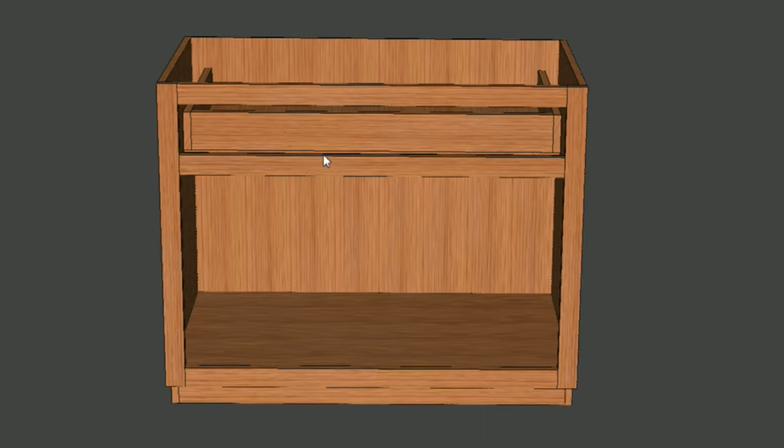Today I'm going to show you how you can make an under sink drawer box for your cabinet. What I've got here is a drawer box and I've removed the back from it, and we'll go over my insets because they are going to be important. We're going to need to know what they are.

My left and my right inset for my drawer box is 1/2 inch. The top inset is 3/4, the bottom inset is 1/4, and the back inset is 3 inches. So, the material that I'm using is 3/4 inch generic for the left, the right, and the front, and 1/4 inch generic for the bottom.

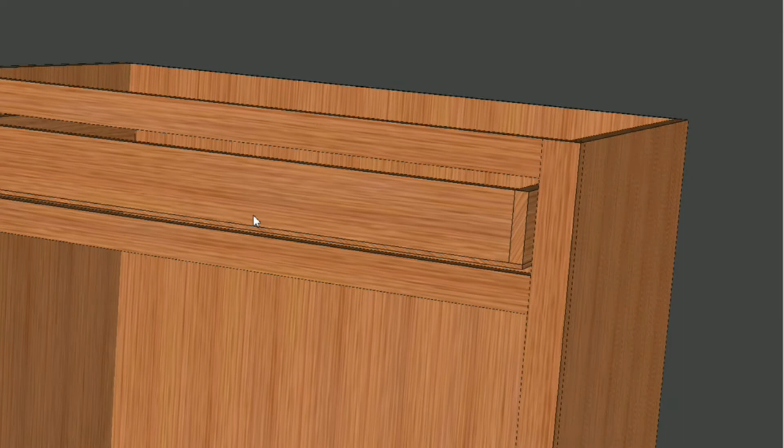Now, all that's important. We're going to be using that information to put our under sink components in here. And what I'm going to do is make a left tray, a right tray, and a front tray. And I'm going to use stretchers for that. But before I get to putting those in, I need some helper stretchers because we can't associate stretchers to drawer box parts. So I'm going to click on my left end and my right end.

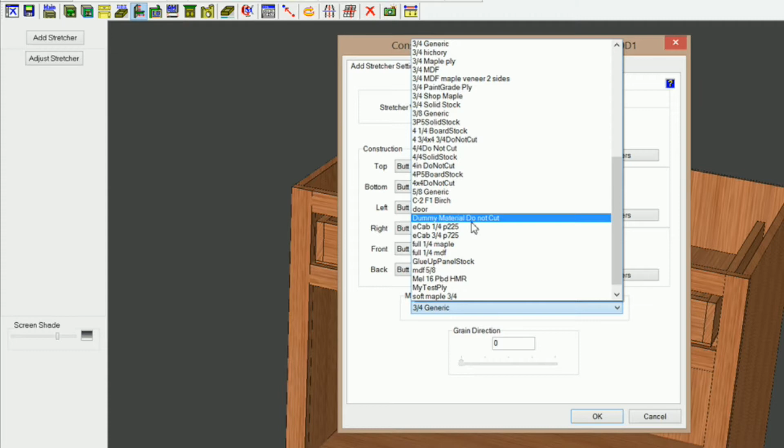But before I do that, I need to set up some construction settings. So I'm going to click on it, and I'm going to set this to be 1 inch, and I'm going to select a material that I have set up for my dummy stretchers or my helper stretchers, and it's a dummy material, do not cut. I've got a red texture on it, and I've got it 1/32 of an inch thick. I'm going to click OK.

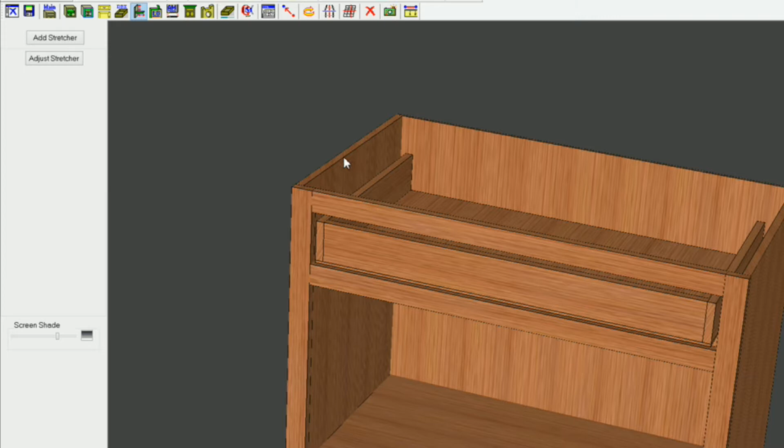Now I can put my helper stretchers in. I'm going to put a left-right stretcher to represent the front of my drawer box, and a left-right stretcher to represent the back of my drawer box. So I'm going to click on my left end and my right end and add a stretcher. And it's got to be an up-down orientation. I'm going to click OK. I'm going to go ahead and add my next one. Make sure it's up-down orientation.

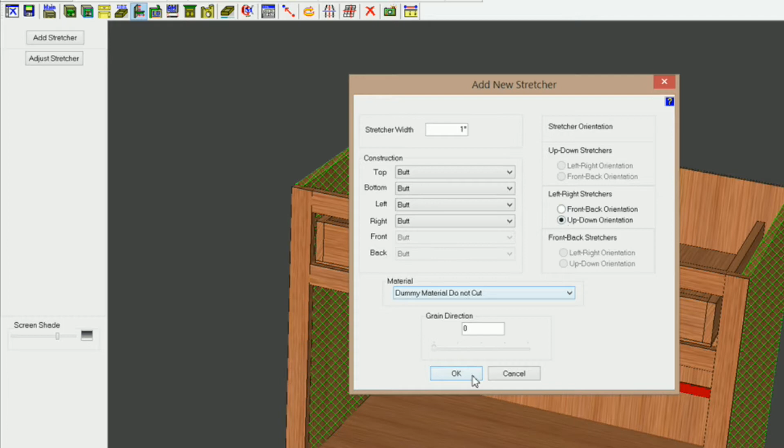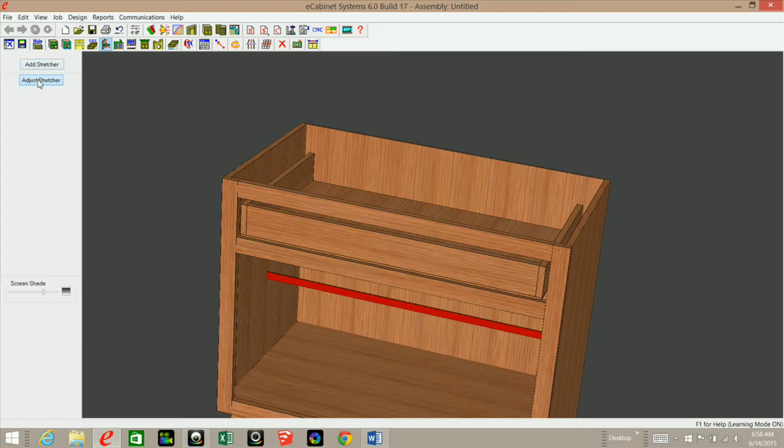And now I need to adjust those. So I'm going to click on this one. Now you see it didn't highlight, but my cursor did turn to that little circle it turns into when it's thinking. I know that it's selected. Sometimes when you got stretchers on top of stretchers like this, you don't see it select. It actually selects the one that's underneath. So I'm just going to go adjust stretcher and Advanced here. And this is the first stretcher that I want to deal with.

And I'm going to be working with Inset 4. What I want is this to represent the inside of the front of my drawer box. And Inset 2 here, I'm going to set it to be on the mid rail and the top of the mid rail. So let me go ahead and get that done. I'm going to go Inset 2 and mid rail and the top of it. Inset 4. I want it to be, like I said, flush to the inside of my drawer front.

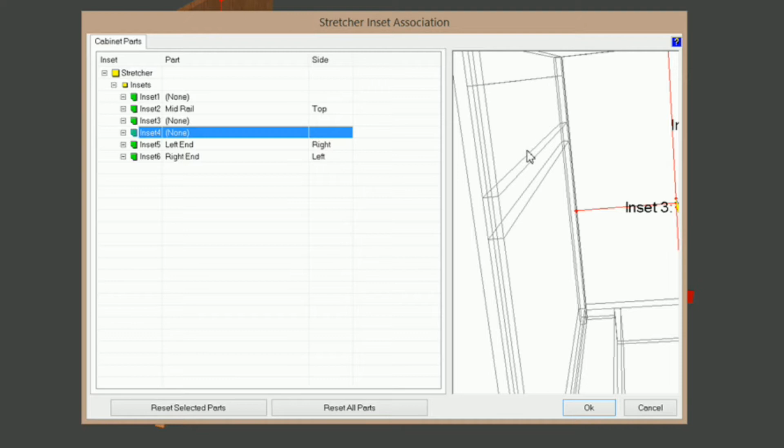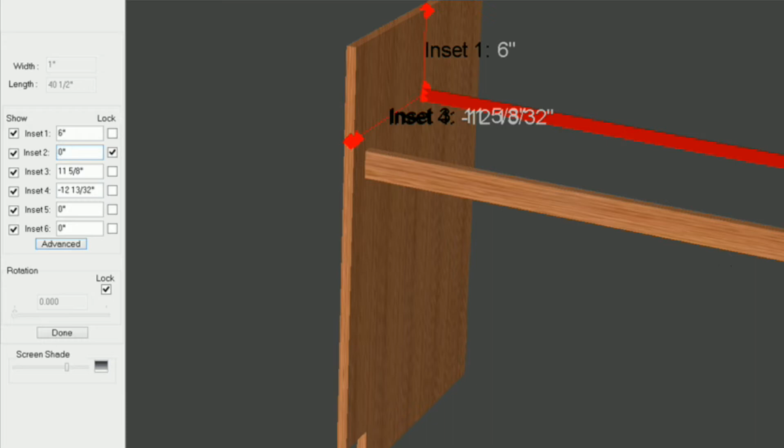Now, I have a 0 scribe on the front of my drawer front, and I'm using 3/4 inch material. But what I'm going to do is go to the mid rail and the front of the mid rail. I'm going to click OK. And under Inset 2, I'm going to set it to be 0, and I'm going to lock it. Inset 4. Now, this needs to be whatever the front inset is for your drawer box.

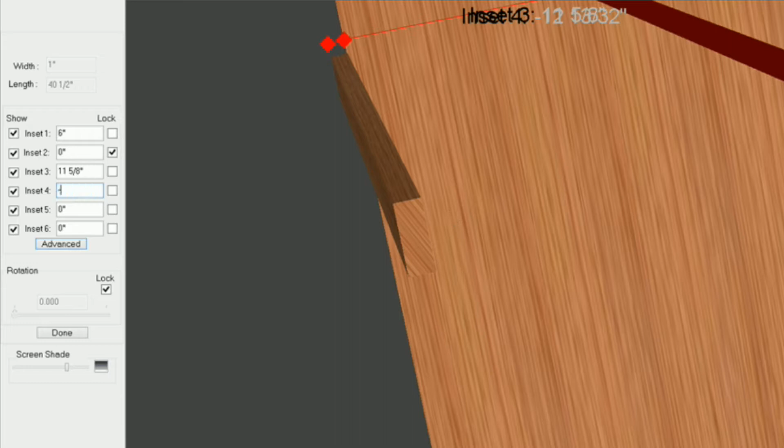So in other words, if you got an inset drawer front going on here, and you got the front of that drawer box inset by the thickness of your face frame here, or the thickness of your drawer front, you're going to need to accommodate for that, plus the material thickness of the front of your drawer box. In this case, I've got my front inset at 0, and I'm using 3/4 inch material, so I'm going to go minus 3/4, and I'm going to lock it. And that should put the back side of this flush to the front of our drawer box.

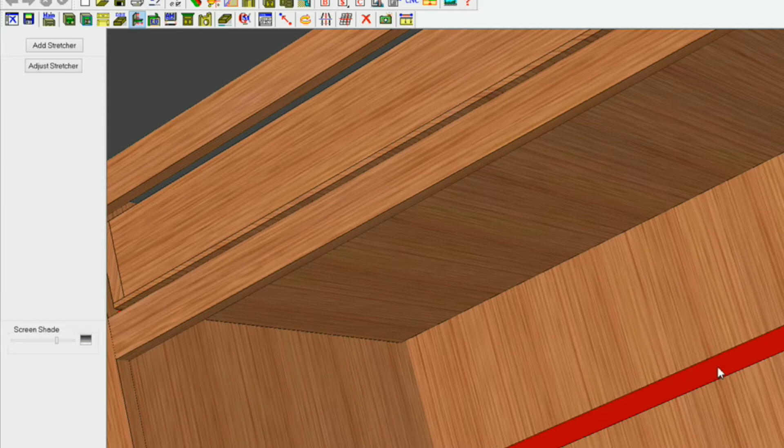So I'm going to click done, and that looks like it did pretty good. So let me go ahead and adjust this one. We'll click on it and adjust. Now this one, we're dealing with Inset 3, and we're going to associate it to the front of the back. So I'm going to go Advanced, and Inset 2, I'm going to go ahead and set it on my mid rail and the top of my mid rail.

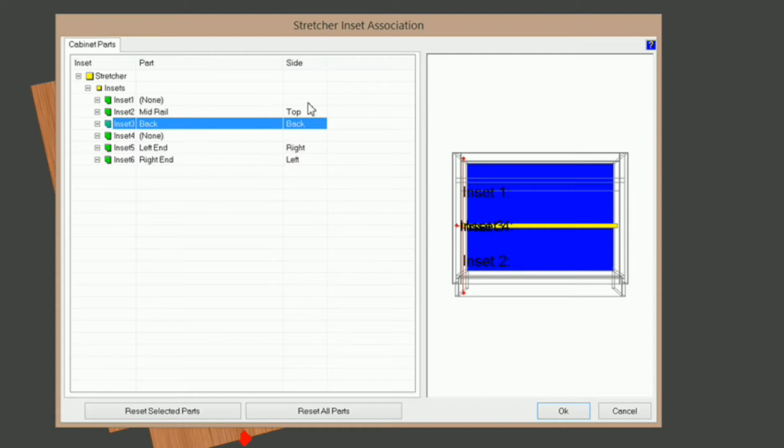And inset 3 is going to be on my back and the front of my back. Okay, because inset 3 is going to represent what would be the inside of the back of our drawer box. Now, I'm associating this to the front of my back.

If I want to remove this back, before I actually remove it, I need to come in here and change the association from the back to one of the ends and the back of one of these ends, because what we're going to do is set this to be whatever the back inset for our drawer box is. So if you remove the back, it's going to go off at the back of one of these ends here. So make sure you remember that.

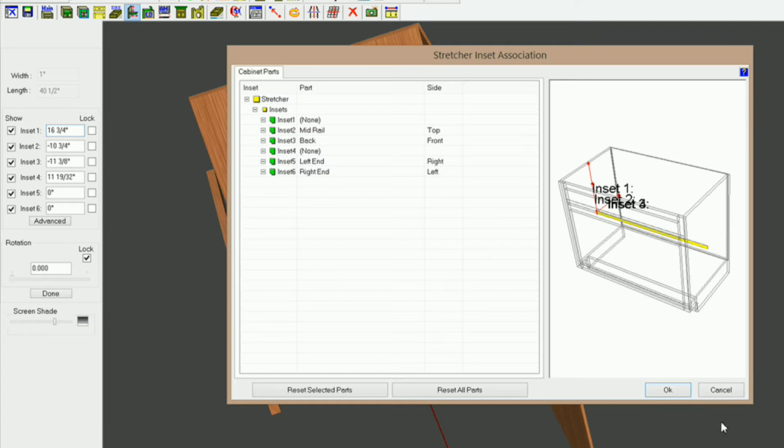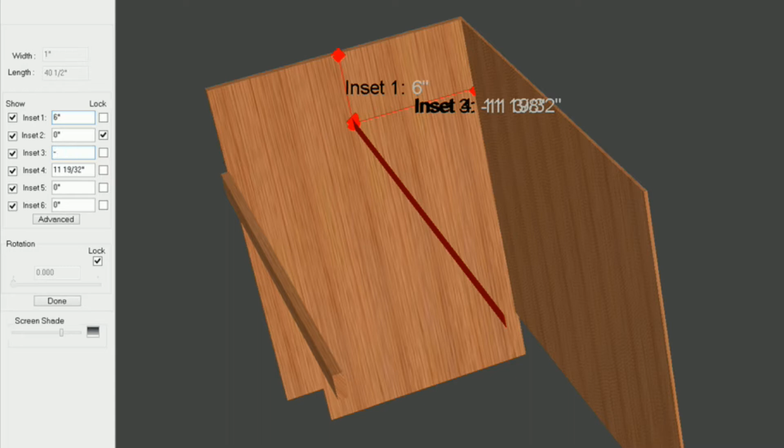If you remove this back and this thing right here is associated to that, you're going to lose a bunch of work. So make sure you remember that. So inset 2 is going to be set to 0 and lock. And inset 3, I'm going to set it at -3 because that's the inset for the back of my drawer box. So I'm going to check that to lock it, and I'm going to go done. We should be 3 inches in here. And let's see, that looks good.

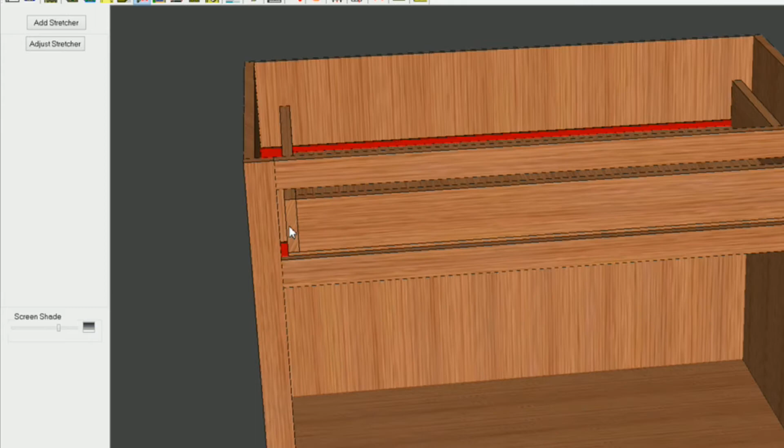Now I can create the rest of my helper stretchers off of those two. So I'm going to create one for our right side of our left tray and one for the left side of our right tray. So I'm going to click on that one and add a stretcher. And it's going to be an up-down orientation also. I'm going to go ahead and make my next one. So add a stretcher, up-down orientation, and put that one in there.

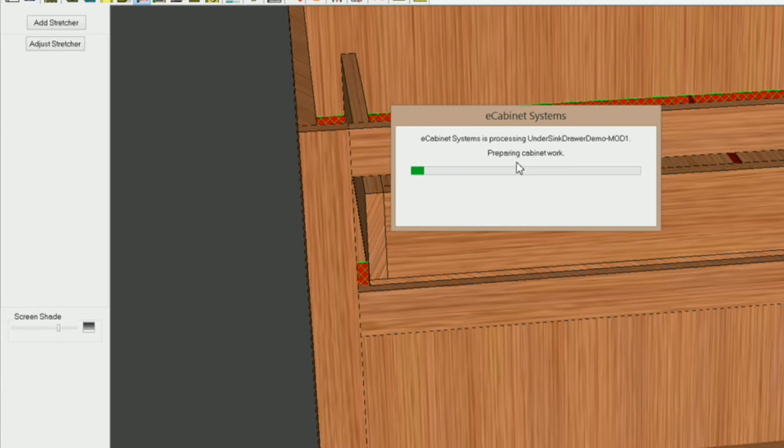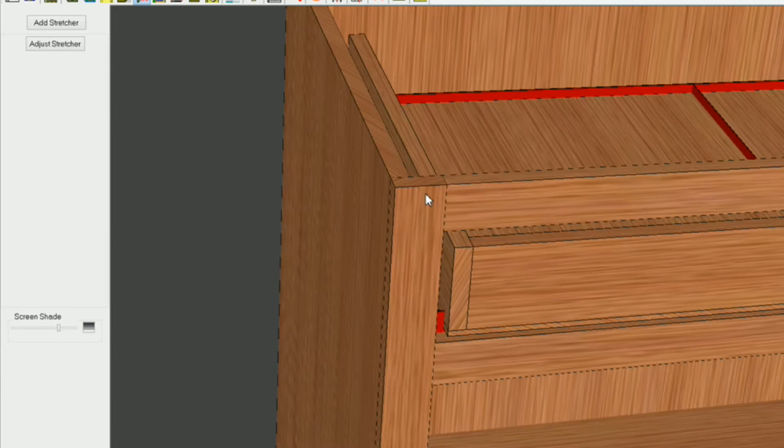Now I'm going to need 2 more, because what I want to have happen here is the components that we put in here, we can't associate them to any of these drawer box parts, and I want them to adjust just like the drawer box does based on the opening height. Okay, so I said a while ago that these were going to represent our tray, but they're not. I'm sorry about that. What they're going to represent is the left side and the right side of my drawer box. Got a little bit ahead of myself there.

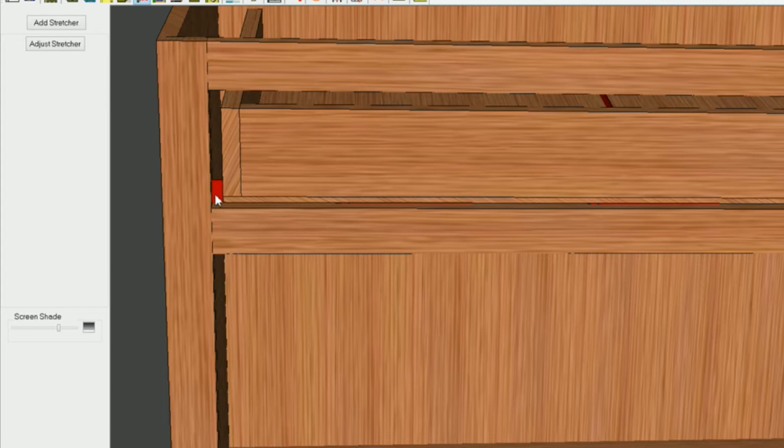But let's go ahead and put those height regulating stretchers in there, or whatever you want to call them. I'm going to click on both of those and add a stretcher. Now this time I want a left-right orientation. Okay, so I'm going to go okay. So there's the one for the top, and I need one for the bottom. I click on that one and add a stretcher. Left-right orientation. Now let's go ahead and adjust these.

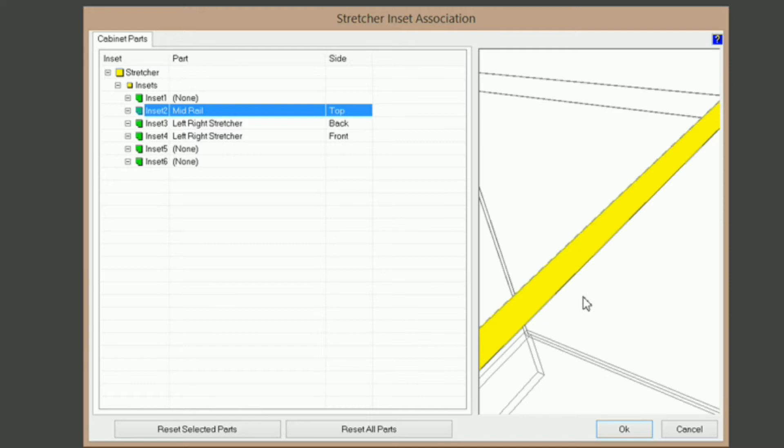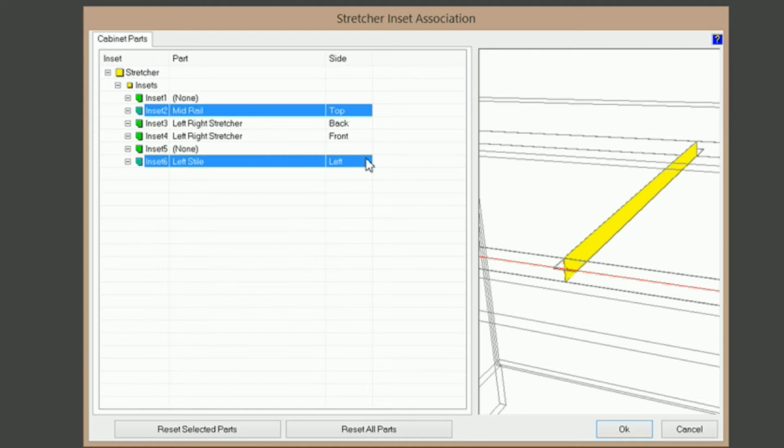So I'm going to click on this one and adjust. And I'm going to go to advance, and I want inset 2 to be on my mid rail again and the top of it. Now we're dealing with inset 6 in this case, because I want this side of this stretcher to be flush to the left side of my drawer box. So inset 6 is what we're going to need to adjust here. So inset 6 is going to be on my left stile and the right side of my left stile. I'm going to click OK.

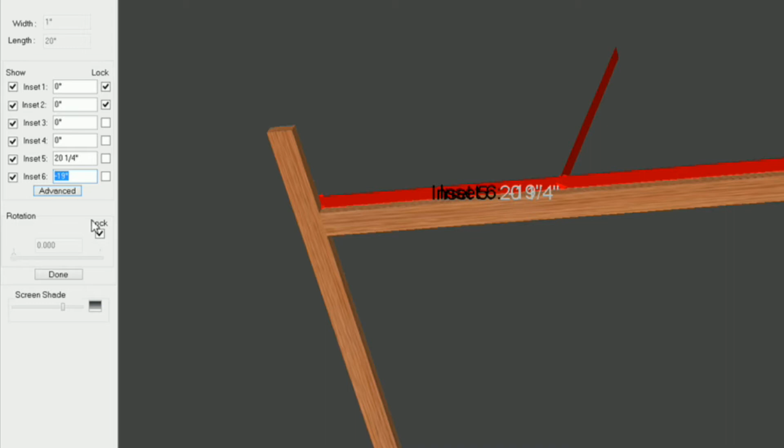And inset 1 is already 0, and I'm going to lock it at 0, and I'll lock this one at 0. Now inset 6, I want it to be whatever my left inset is for my drawer box, which is 1/2, and it needs to be a negative 1/2, so -1/2, and lock, and done. And you can see, if I turn this around and zoom in here, it is indeed flush. The right side of that stretcher is flush to the left side of that drawer side there.

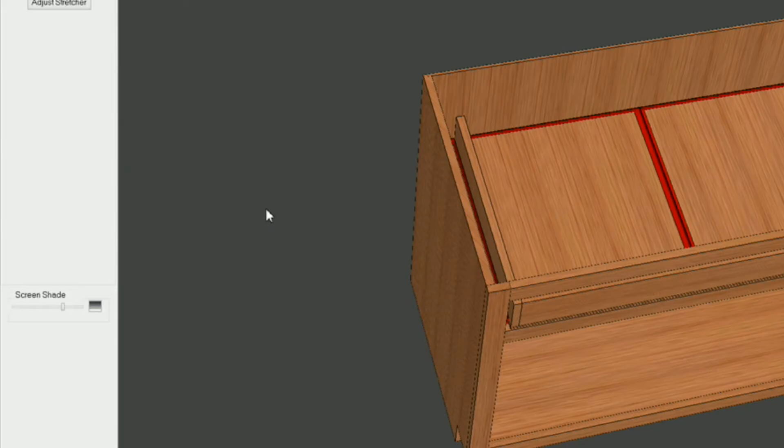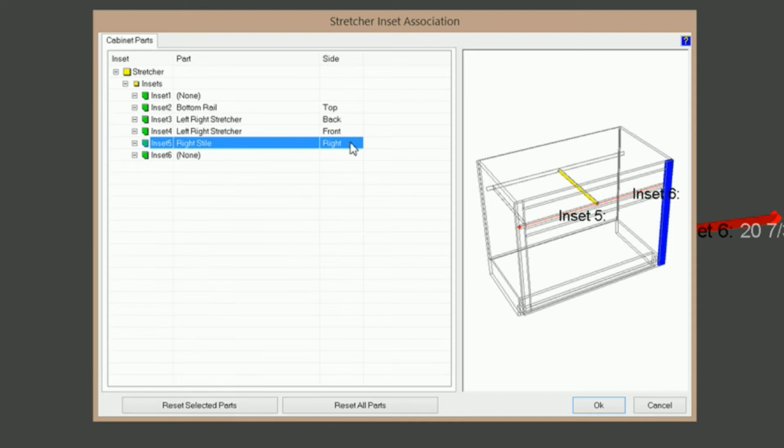So I'm going to come over here and click on this one and do the same thing, except for the right side of my cabinet there. So I'm going to go advance, inset 2, mid rail, and top. And this time I'm dealing with inset 5. So I'm going to click on inset 5, and I want it to be on my right stile and the left side of my right stile. I'm going to click OK.

Now what I need to do is go ahead, and I got something going on right here. Inset 2 is saying 22. Let me go back to Advanced, and you see right here that I've got bottom rail selected, and that is wrong. I need to go to mid rail and the top of my mid rail. Inset 5, I got right stile and left. I'm going to click OK, and now we're back where we need to be.

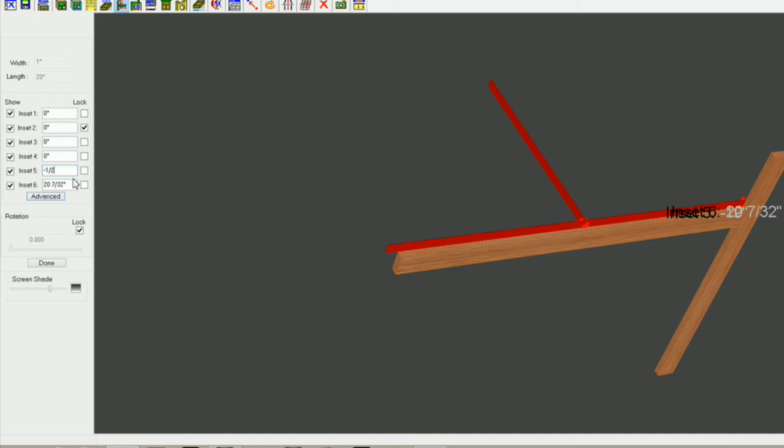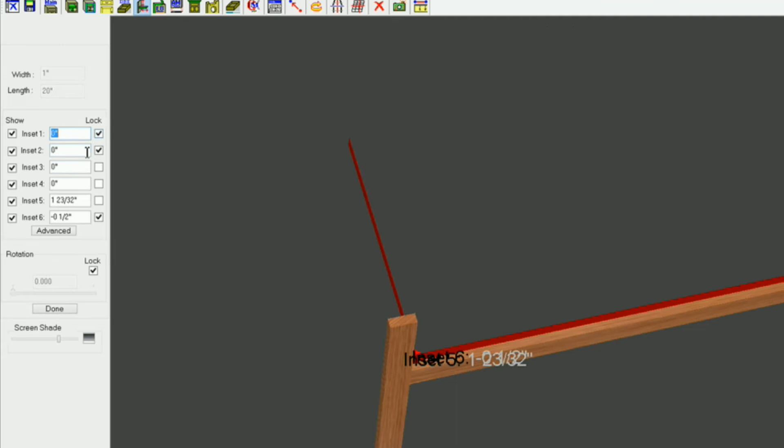I'm just going to lock, Inset 2 there, and Inset 5, I need to be at -1/2, and lock, and that looks good. So that looks fine to me. I want to double check something here. I think I may have locked Inset 1 on this one. I'm going to double check, and I did. I want to unlock that. That might give me a fit later on down the road. So I'm going to go done, and all that looks fine.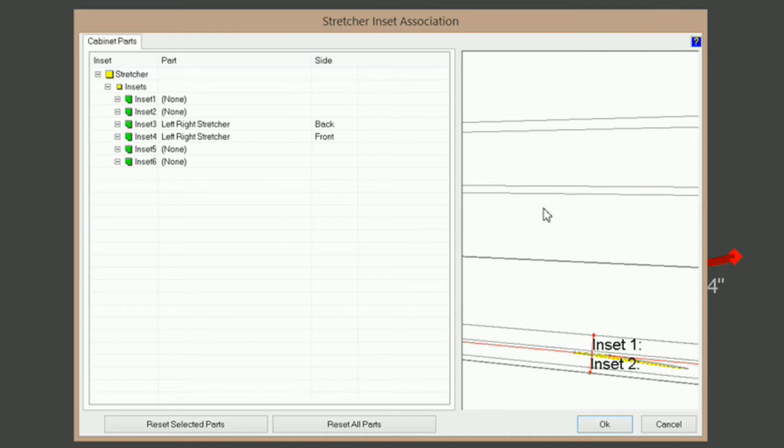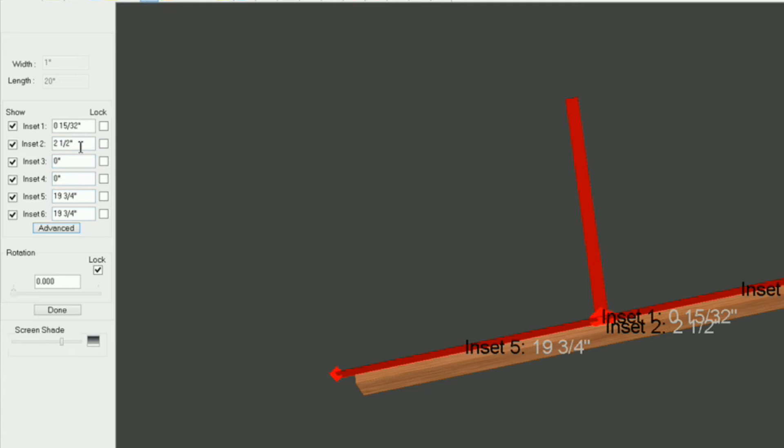So what I'm going to do now is work on these. So I'm going to go to Adjust Stretcher and Advanced. And what I want is, I want Inset 2, which is the bottom of this stretcher, to be flush to the top of my drawer box. So I'm going to click on Inset 2, and I'm going to be on the mid rail and the bottom of my mid rail. Now I'm going to leave everything else just like it is, because we're going to make these phantom parts later on. So I'm going to go Inset 2. I want it to be whatever the top inset for my drawer box is. So 3/4 and lock, and it moved down.

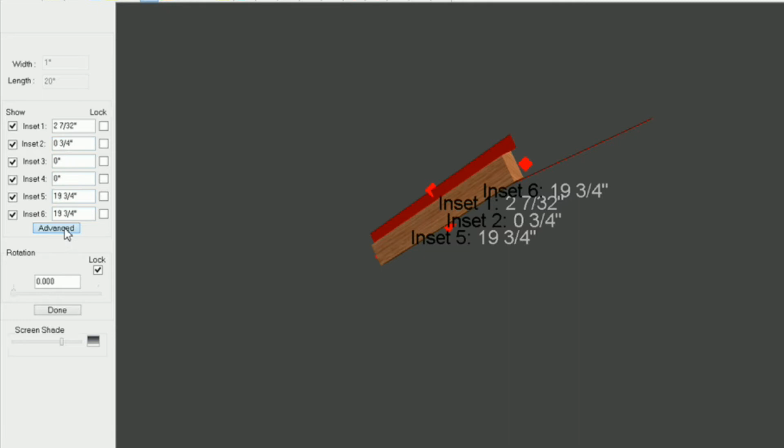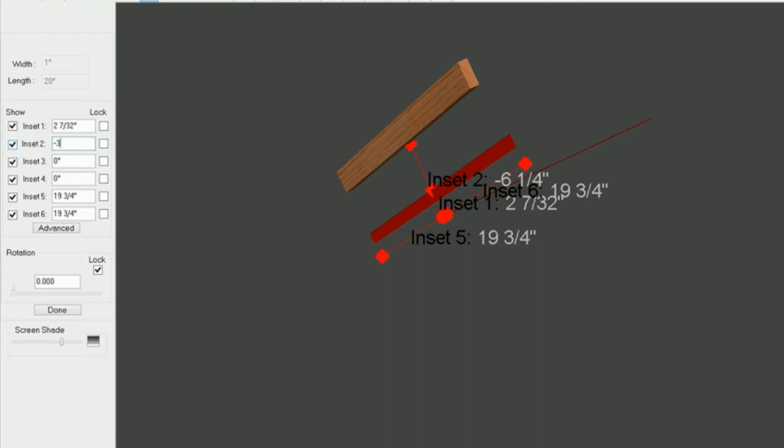Let's see, I've got my inset wrong on that. I'm going to leave it like it is, but I'm going to unlock it, go back to Advanced, and I've got Inset 2 on the mid rail. That really needs to be on the top rail and the bottom of my top rail. Got a little bit confused there. I'm going to click OK, and this needs to be -3/4. It might be a +3/4, but it looks like I'm good to go there. So that's all I need for that one. I'm going to go done and see if I'm flush to the top of my drawer box, and I am.

So now when I change my opening height, that's going to adjust accordingly. Now if you put another drawer box in here and you change this, for example, from 3/4 to 1 or 1/4 inch, you're going to need to select this stretcher, come back to Stretcher Editor, select this stretcher, and go to Adjust Stretcher and make your changes.

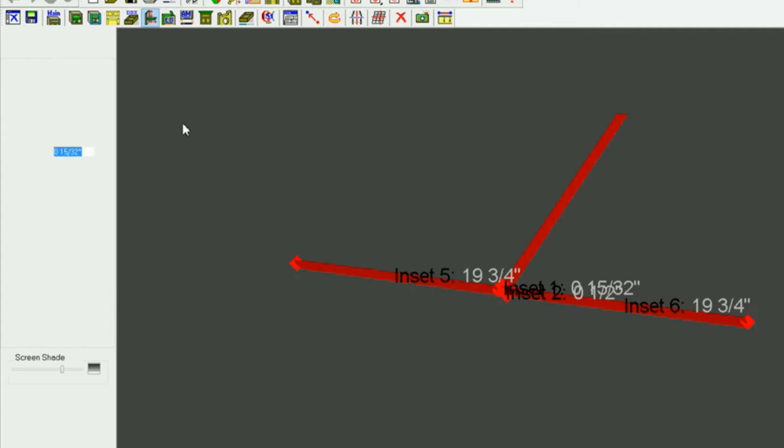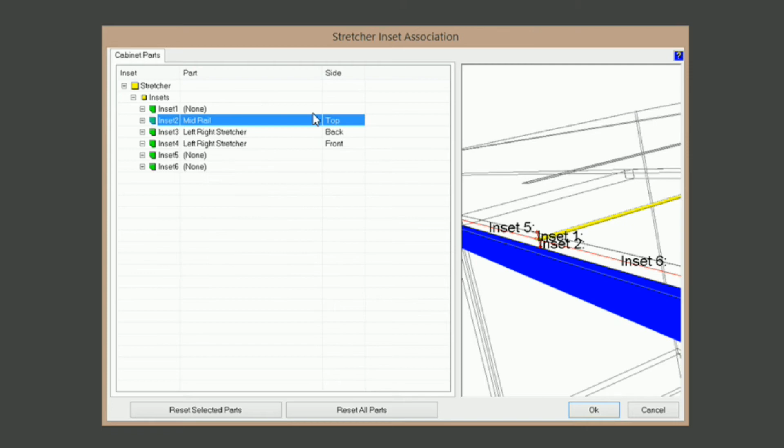Let's go ahead and get this one like it's supposed to be. So I'm going to go Adjust Stretcher and Advanced, and what I want this one to do is rest. Inset 2, I want it to follow the bottom of my drawer box, okay, the inside or the top of the bottom of my drawer box. So I'm going to go Inset 2, and this time it needs to be on the mid rail and the top of the mid rail. I'm going to click OK.

Now right now it's saying 1/2 inch, and that is correct, because I've got a 1/4 inch inset for the bottom of my drawer box, and I got a 1/4 inch material for the bottom of my drawer box. But I'm just going to retype 1/2 inch just to make sure. I'm going to lock that, and I'm going to go done.

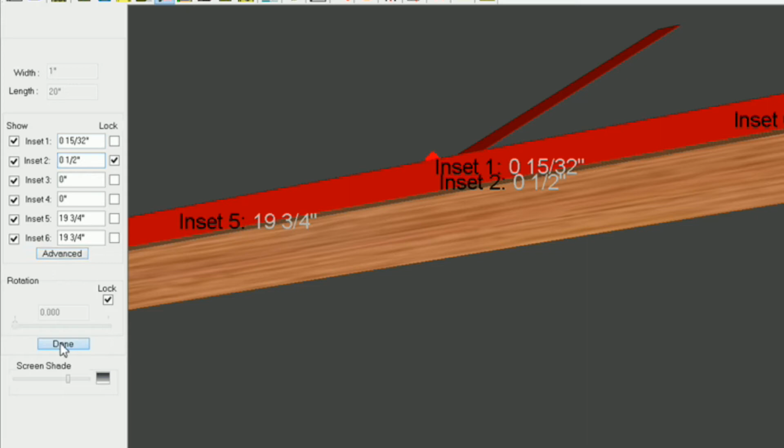And now if you change this inset right here, in other words, you put another drawer box in here and you make that different, make sure you come in here and adjust this. Also, if you change the thickness of your material, make sure you adjust that, because these are going to regulate the height of the components that we're getting ready to put in here.

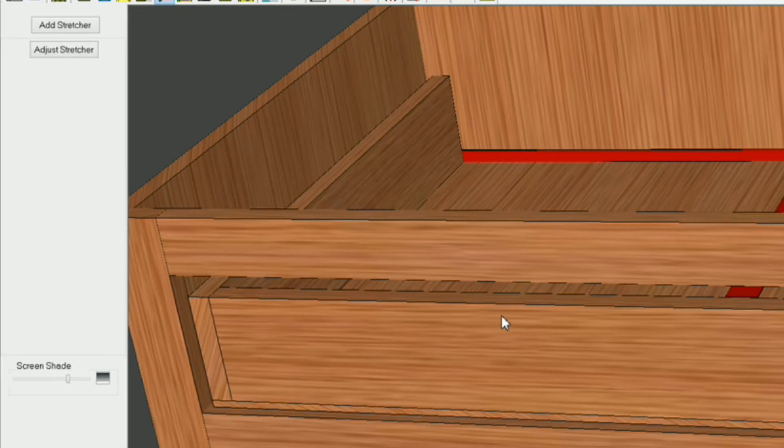So let's go ahead and put some in here. I'm going to create my left tray and my right tray. So I'm going to click on this one, and this one, and add a stretcher. Actually, what I need to do before I do that, so I don't have to do it every time, I'm going to go to construction settings. I'm going to change this to 3 3/4, which is the actual height of my parts for this particular drawer box here.

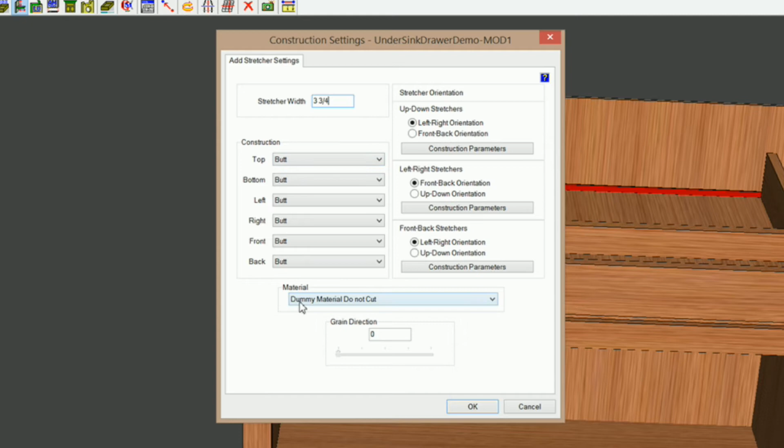I'm going to select my material. It's going to be 3/4 inch generic right there. I'm going to click OK. Now I don't have to select that every time, it's going to default to it for me.

So I'm going to select you, and I'm going to add a stretcher, and I want an up-down stretcher. I'm going to click OK. Now I need another one for my right side. Add a stretcher, and make sure it's up-down orientation. So now I got my left and right in there for my tray.

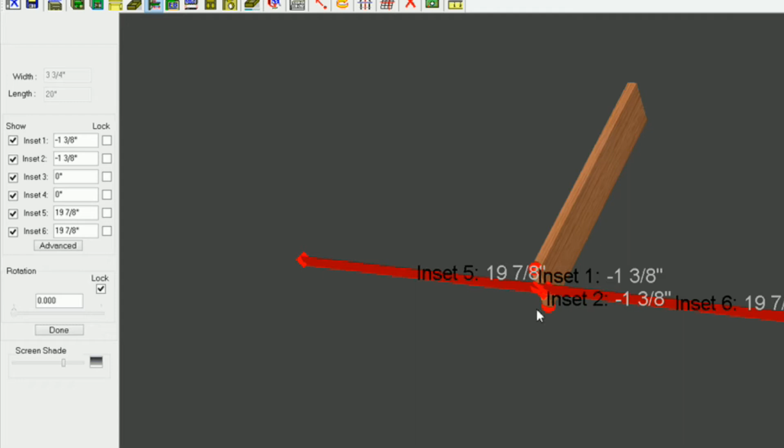I'm going to click on one of them and adjust it. What we're going to be dealing with is Inset 6, or the right side in this case, of that tray. We're going to be able to adjust that by using Inset 6. In other words, this is what's going to regulate the opening that we're going to cut out in that drawer box.

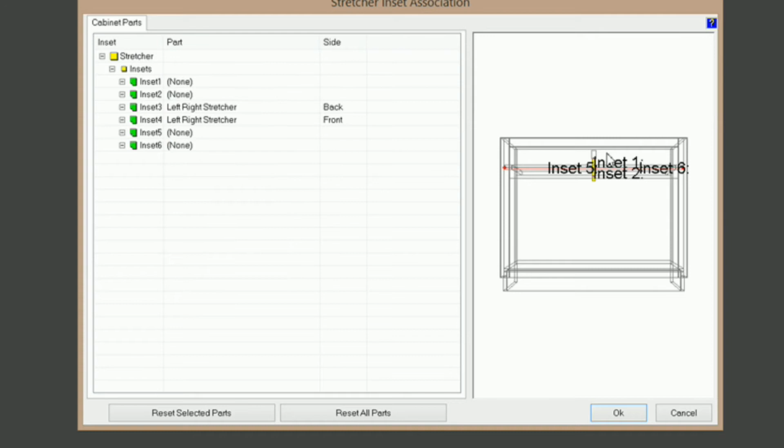So I'm going to go to Advanced, and I'm going to go to Inset 1. Let me hit Escape real quick and rotate this where we can see what's going on. What I'm going to do is associate Inset 1 to the bottom of this one, and Inset 2 to the bottom of this one here. So when I click on Inset 1 and go to my drop down here and just scroll down...

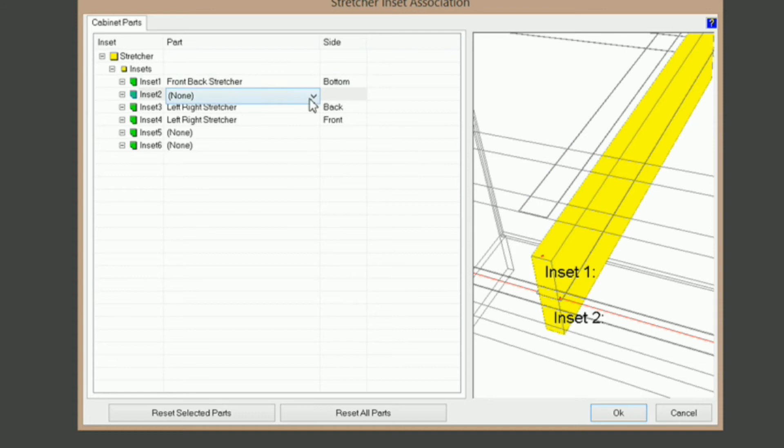You can see it highlight, and it defaults to the bottom, and that's what I want. Inset 2, when it highlights that one, I need to be on the bottom. It's saying the top, so I'm going to change that to the bottom. Now Inset 6, this can be whatever you need it to be, and you can come in here and change it at any time on any job or any cabinet that you have this installed in.

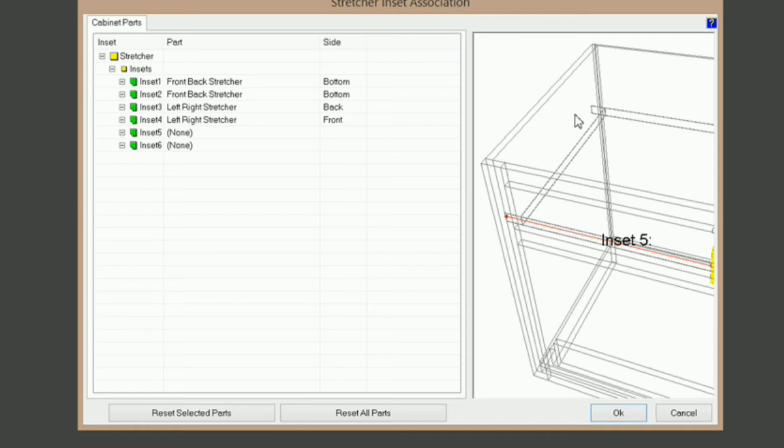But what I'm going to do is I'm going to go from the left side or the right side of my left end. Now, if you're going to be pulling all your measurements or your specs for whatever it is you're working around in here from the outside of your cabinet, in this case we have a face frame, you can go to the left side of the left stile there, or you can go from the inside of this, the right side of the left stile, and you can even go off of this stretcher right here. It's entirely up to you, whatever method you need to use.

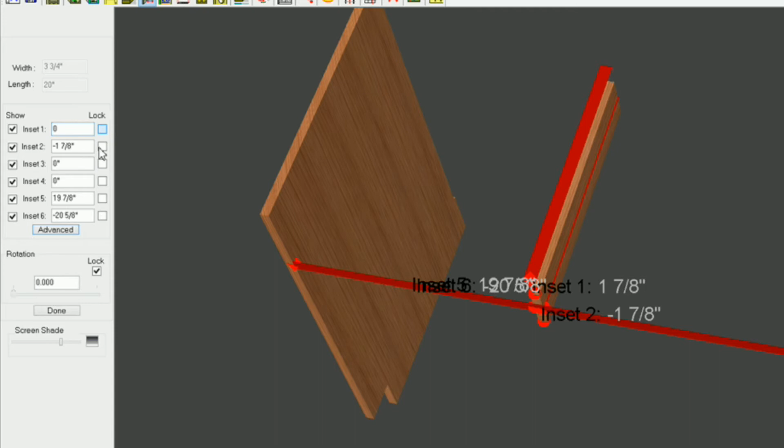So I'm going to select Inset 6, and I'm going to go to my left end, and I want to be on the right side of my left end. I'm going to click OK. Now Inset 1, I'm going to put it at 0 and lock it. Inset 2 is 0 and lock.

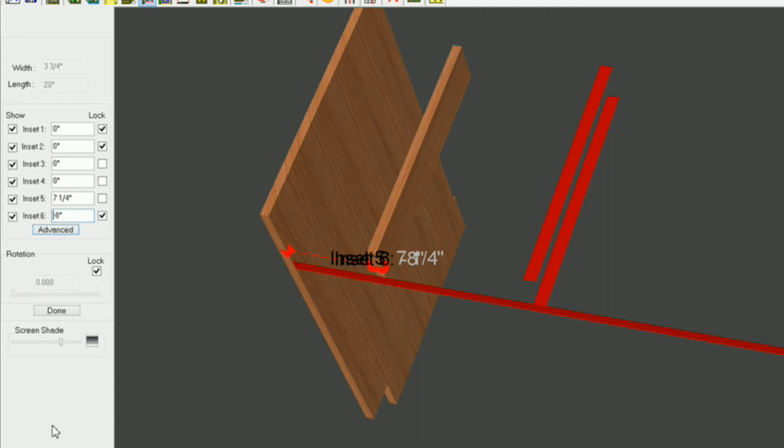And Inset 6, I'm just going to put a measurement in here right now, and it's going to be -8. Make sure it's a negative. That's going to put it 8 inches from the inside of this left end to the outside of this tray here. So I'm going to go done. I got everything locked, I'm going to go done.

Now for this one, same way, we're just working on the right side of our cabinet. Adjust stretcher. We're dealing with Inset 5 this time. So I'm going to go Advanced, and Inset 1, again, it's going to be on our height stretchers here, our helper stretchers we got to regulate the height of our components. So Inset 1 is going to be on this one right there and the bottom, and Inset 2 is going to be on the one underneath it and the bottom of it.

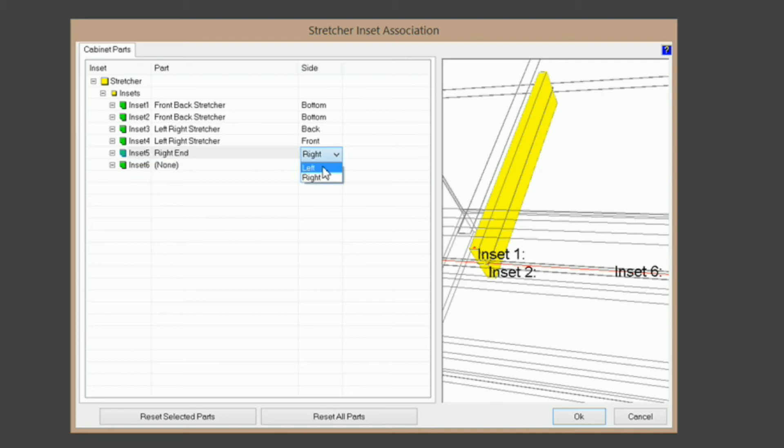And Inset 5 is going to be on our right end and the left side of our right end. So I'm going to click OK and change these to 0 and lock. Change you to 0 and lock. Inset 5, I'm going to put -8 inches.

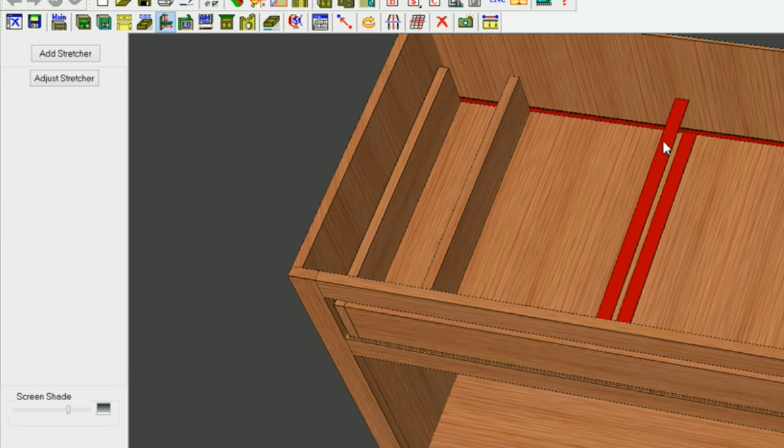And this is, you come in here and you click on this stretcher and you change it to whatever you need. I'm going to go done, and that's it for those two.

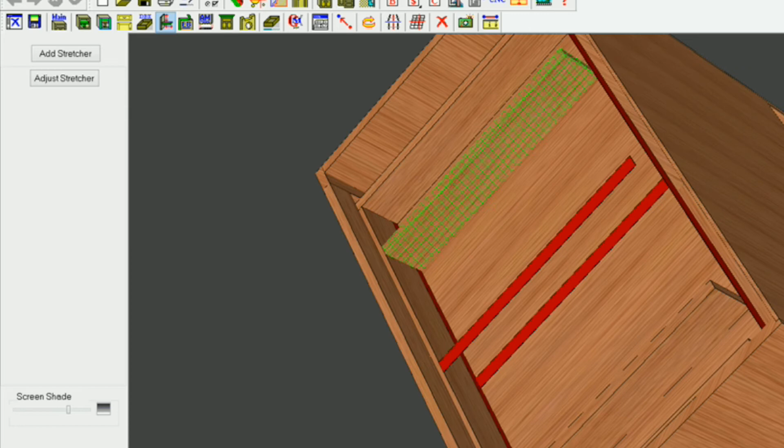The next thing I'm going to do is create a front tray. Now you may not always need a front tray, you may not always be able to have one. If you don't want it, you can click on that part in main and make it a phantom part, and it won't show up on any of the cut lists. So I'm going to click on this one and this one, and add that stretcher in. 3 3/4 up down orientation and OK.

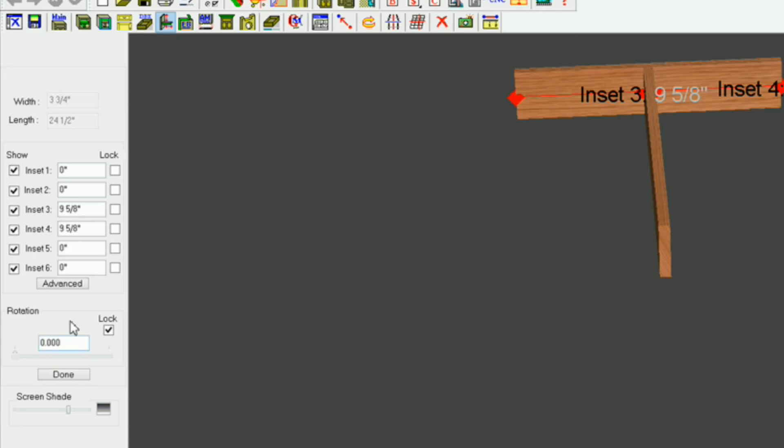So there's that. Let's go ahead and adjust it. I want the back side of this inset 4 to pull off of the inside of our face frame. So I'm going to go advance and inset 1, and put you in there.

Let me rotate this around so I can see when I got them selected. Inset 1, bottom, inset 2 needs to be bottom. Now, inset 4 here, I'm going to set it to be on my mid rail and the front of my mid rail. Actually, yeah.

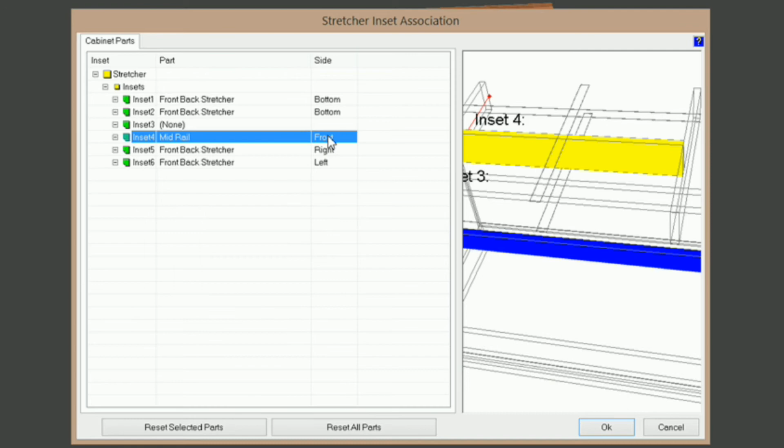Let's see, we're pulling off of the inside of our left end and right end. So let's go ahead and just pull off of the inside of our face frame. Right now I got it on the front, so I'm going to change it to the back. And like I said, you can adjust this to whatever you want. I'm going to click OK.

And I'm going to set you to 0. Now notice how I'm retyping these. You can try without doing it, but sometimes I've had it screw things up, so I just make it a habit of just retyping what I want there.

So I got 0, 0 lock, and inset 4, I need it to be minus whatever I want to clear, whatever I think I need right here to clear my front of my sink there. So I'm just going to put minus 2 inches. Whatever you come up with, you can come in here and adjust that.

I'm going to go done. Now you can see that we got our front tray in here. Now it's not a lot of room, but you can put a toothbrush or some toothpaste in there or whatever. But if you don't have enough room for one at all, just make it a phantom part.

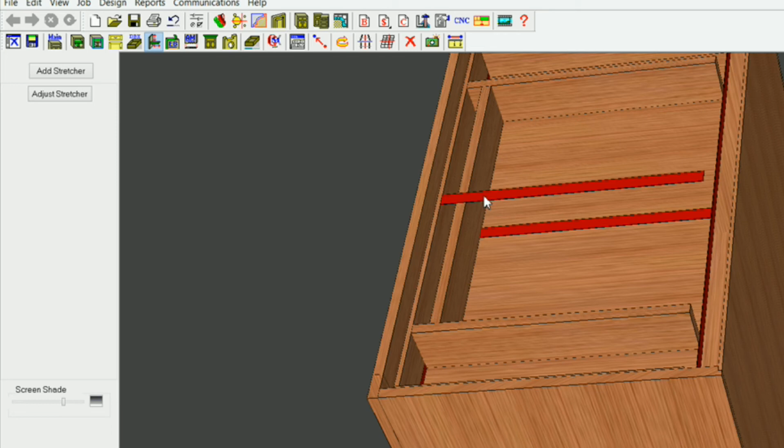And if you need to drop this down, any of these really, you can adjust this stretcher if you want to make all these parts right here less. Just adjust this height right here, and it'll automatically make these smaller.

If you just need to adjust the front, then you just click on this and go adjust stretcher, and change inset 1 to whatever you need it to be, as well as inset 4.

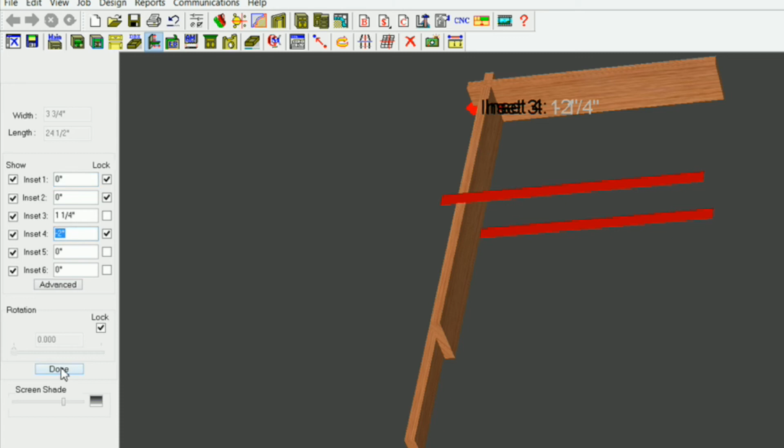You know, play around with this, experiment with it, and let me know what you come up with. If you come up with something different, I want to know. I want to see what everybody else comes up with.

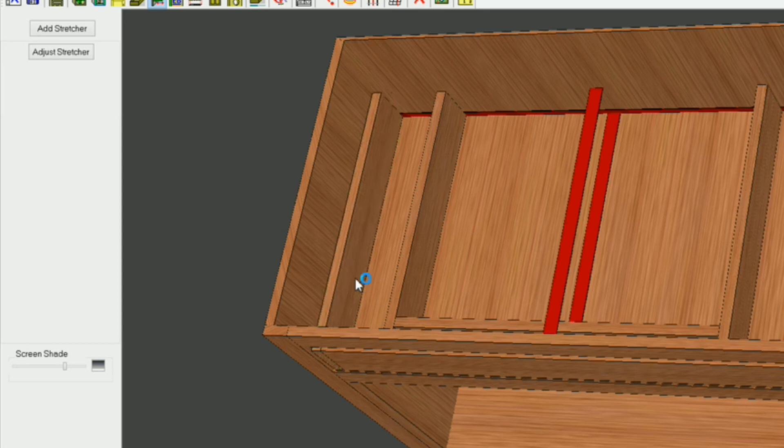So what we need to do next is put our back in here on this one and this one. I'm going to click on this part. Actually, I can't click on that because that's actually a drawer box part. I need to click on my helper stretcher here, this one. First, I want to click on this one, and you'll see why. It's going to put it flush to the top for me. It doesn't really matter, but whatever floats your boat.

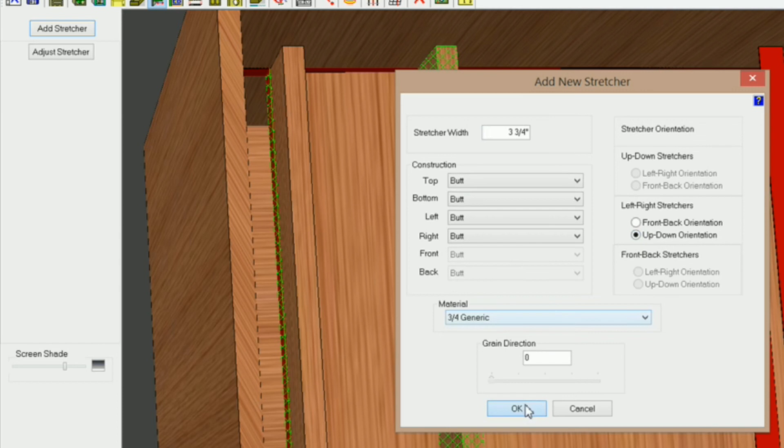So I'm going to go to add a stretcher and up down orientation and OK. So there's that one, and notice how it's going through this. I'm going to fix that in just a second.

So I'm going to click on this one and this one right here and add a stretcher. Up down orientation and OK. And we're just about done with this thing.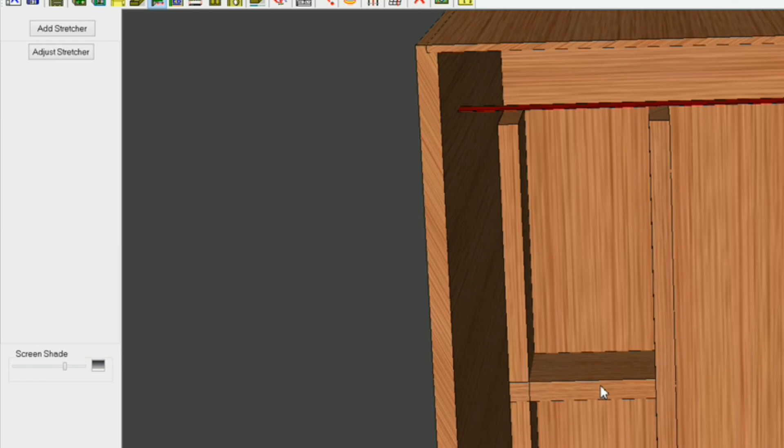So I'm going to select this one, edit it, and go to adjust stretcher. I'm going to go to advance, and set my inset 1 to be on this. So inset 1 again on my helper stretcher there, and the bottom of it. Inset 2 is going to be on my other one, and the bottom of it.

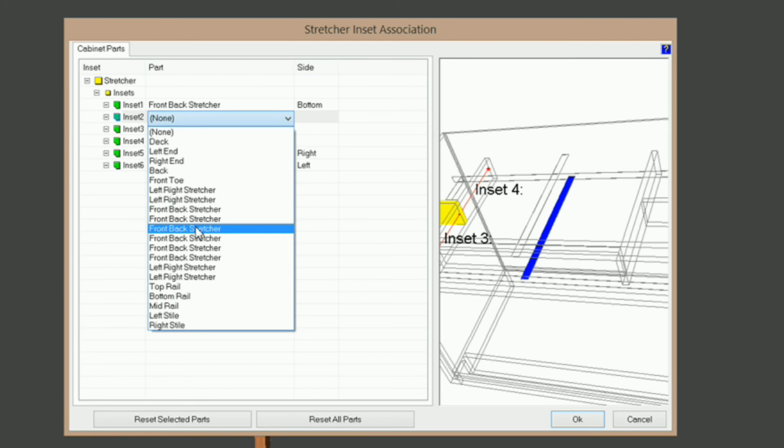Now inset 4, I want to be on the back of this stretcher right here. So I'm going to click on inset 4, and when I get that one highlighted, I'm going to click on the back. That's going to put it flush to the back. I'm going to click OK. And I'm going to go 0 and lock, and 0 and lock. And inset 4, I want it to be 0 also, and lock it.

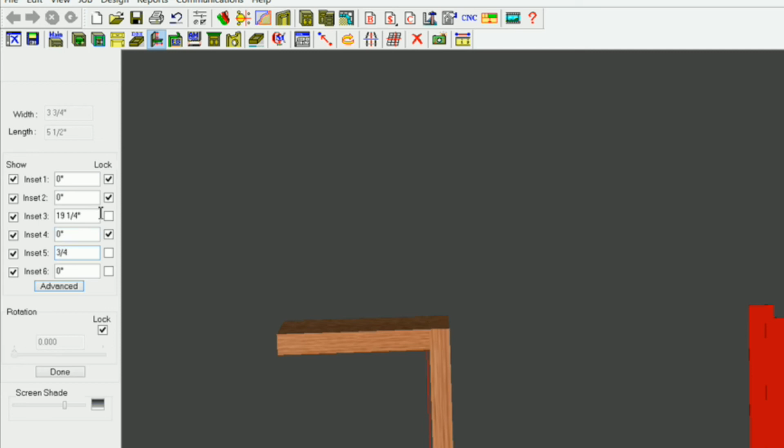And now, inset 5. Remember how it was protruding through the actual drawer box end? What I'm going to do, and watch inset 6 here, okay? I'm going to change this to 3/4, and it's going to move it over, but watch inset 6, it moved that over too. So what I'm going to do is set it to 0 and lock it.

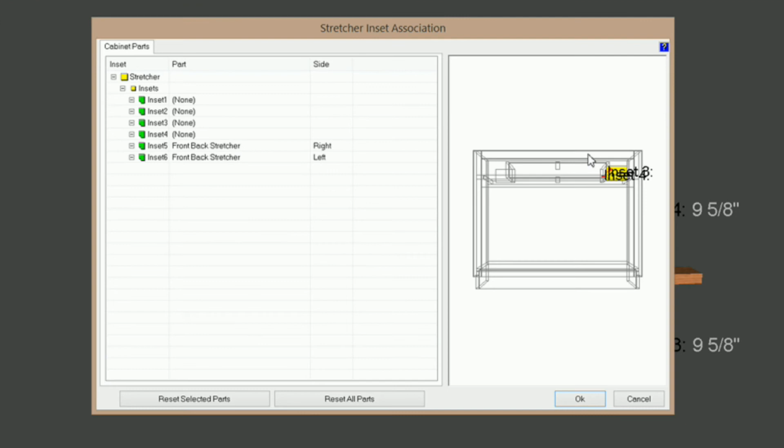That made that right. I'm going to go done, and I'm going to do the same thing to this side. Click on it, adjust, advanced, and inset 1 again. Bottom, inset 2, bottom.

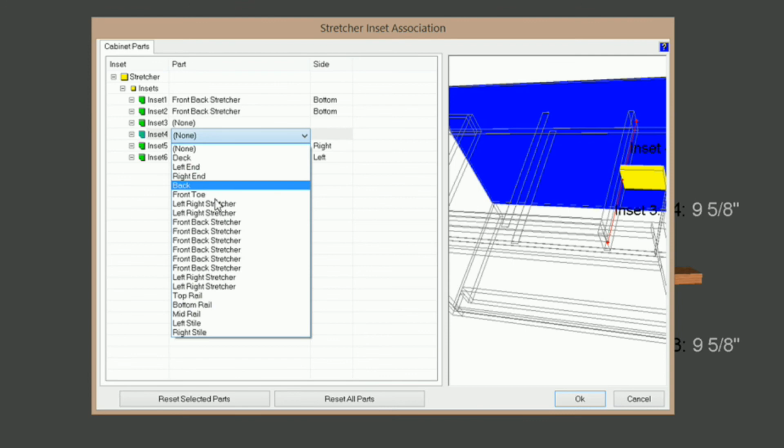Now, inset 4 again, I want it to be on this stretcher. So scroll down till it highlights it, and I want it to be on the back. And I'm going to go done, or OK. Now do the same thing to this. The only difference is we're working on the left and the right. So I'm going to retype 0 here and lock it, and 0 and lock.

Now, inset 5, this is inset 5. I'm going to go ahead and lock that, that way it'll stay at 0. And I can actually retype 0 if I want to make sure. So inset 6, I need it to be 3/4, and I'm going to lock it. So that should be good to go. Whoop, I need to change inset 4 to 0, and lock it. And done.

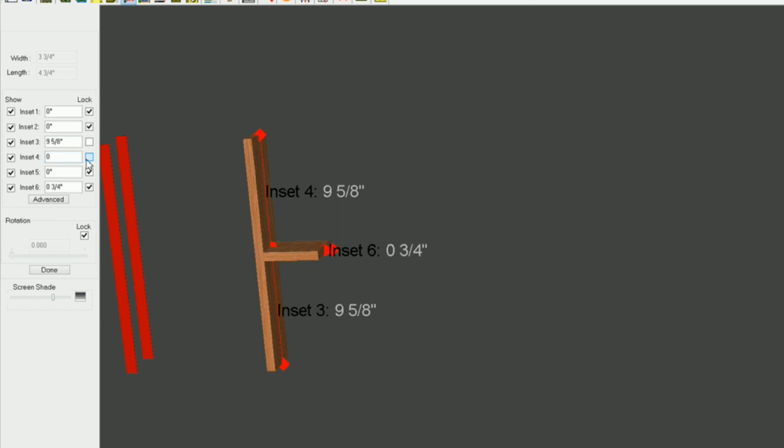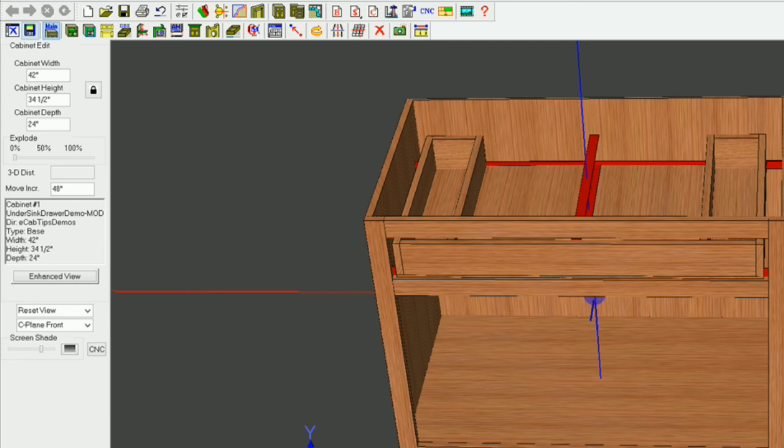So that basically completes our under sink drawer box. What we need to do now is test it. So I'm going to go back to main, and I would go ahead and save this to make sure that if we screw anything up, we got something to go back to. Make sure you save it, because you never know what's going to happen.

So let's see what we're going to do here. Let's go ahead and change the width to 36, and the depth to 21. And that appeared to adjust properly for us. I don't see anything out of the ordinary. Everything looks flush. If I hover over this, it should be 3 3/4, and it is.

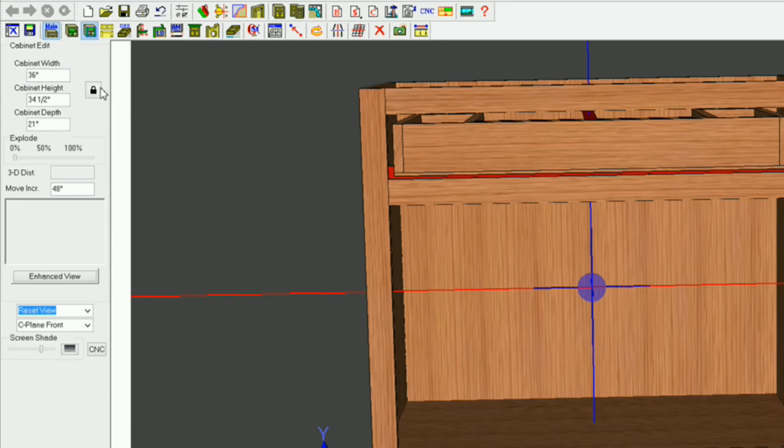Oh, that looks good. Let's play with the height, the opening height here. So I'm going to go into my face frame editor, and I'm going to change the height of that opening from 5. Let's change it to 4 and enter. And let's go back to main.

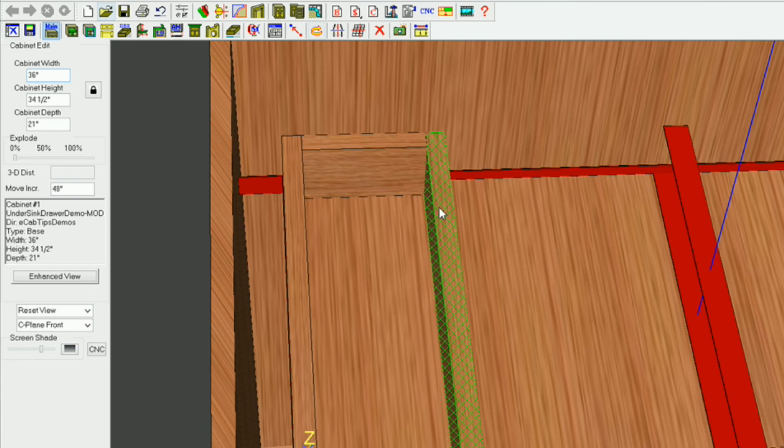And that looks good. Everything adjusted. And like I said, you can adjust these. You go back to stretcher editor, click on the stretcher, and adjust it. So let me show you this one real quick, because probably these are going to be the biggest ones that you're going to move around. Let me go back to main, or to stretcher editor, and just show you real quick how to adjust this.

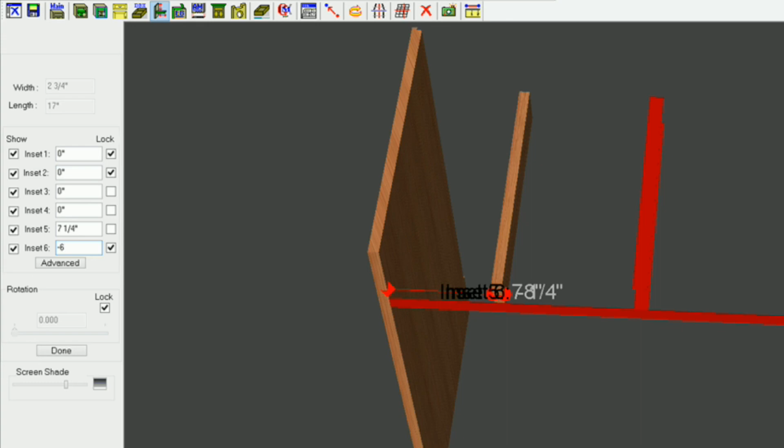So I'm going to click on it. I'm going to go to adjust stretcher. And right now I've got it at -8. So what if we need a little bit more clearance? Let's go -6 and enter. And go to, and there you have it.

That moved, everything moved. And if you want to change how this reference, right now we're going off of the inside of this end, you would just click on this, whichever stretcher you wanted to change there, and go to adjust stretcher, go to advanced, and under inset 6 you would just select whatever other component you wanted to get it off of.

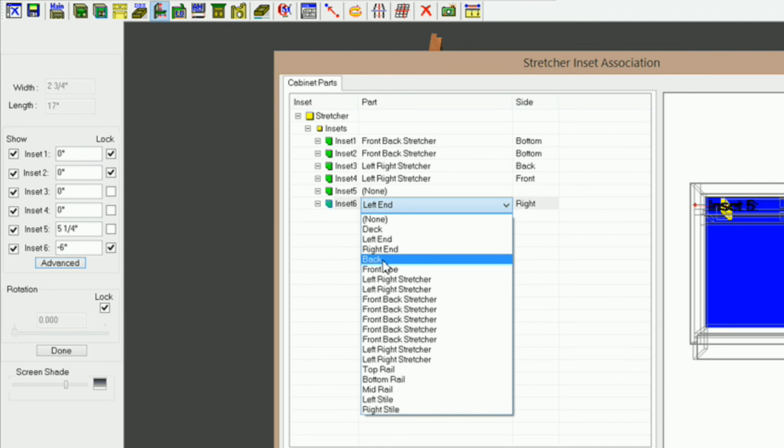So I'm going to go back to main, and I'll probably do another video on this, a little bit shorter one, and we'll be going through and tweaking everything. We'll actually remove this drawer box, and we'll change some of the settings, and I'll show you how to adjust all these stretchers. In the meantime, I hope this video helped you.